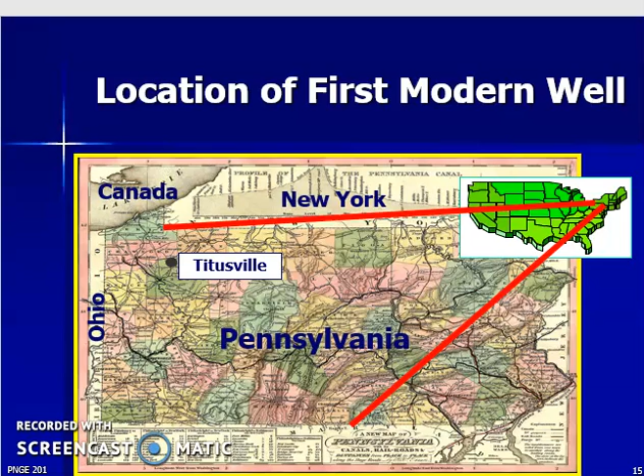So we're continuing on the topic of history of oil wells. The first commercial oil well was drilled in Titusville, Pennsylvania by Edwin Drake in AD 1859, and the reason they drilled this wellbore was based on the evidence of oil seep on the surface.

Later, in the 1890s, a guy named Pattillo Higgins promoted a drilling site near Beaumont, Texas. The reason he selected it was due to the features of the surface, which was a dome. He started drilling extensively during the 1890s, and he couldn't find oil.

Then he sold his properties to a guy named Anthony Lucas, who continued drilling deeper, and found that there was oil underground. That was the start of the discovery of the Spindletop well.

This was a change in the history of the oil industry, because the reason they drilled that wellbore was the location on the surface, not an oil seep. They didn't initially see any oil on the surface, but based on the geology, they decided to drill a wellbore.

The depth of this wellbore was 1,000 feet, in Beaumont, Texas. The well was drilled in 1901 by Anthony Lucas, and the rate of production was much higher, 100,000 barrels of oil per day.

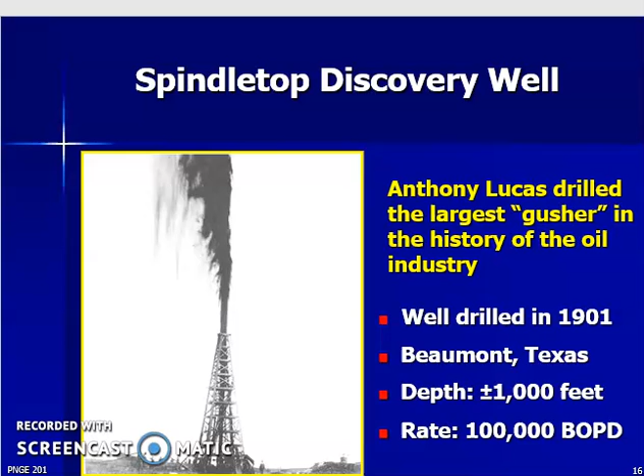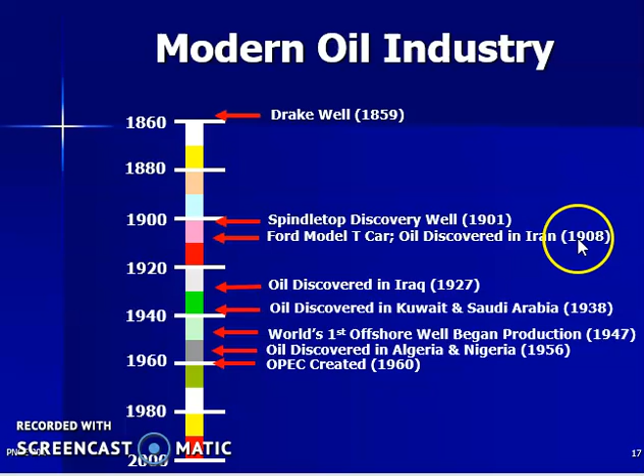This is a chart summarizing the modern oil industry. It started in 1859 with the Drake well, then the Spindletop discovery well, which we just discussed, and then oil was discovered in Iran in 1908, then in Iraq, Kuwait, Saudi Arabia, Algeria, Nigeria, and then OPEC was created.

OPEC is an association of countries that produce oil — the Organization of Petroleum Exporting Countries. It has 13 nations and was founded in 1960. There are a couple of countries which are members of OPEC. The US is not a member of OPEC, but it's an organization of petroleum producing countries.

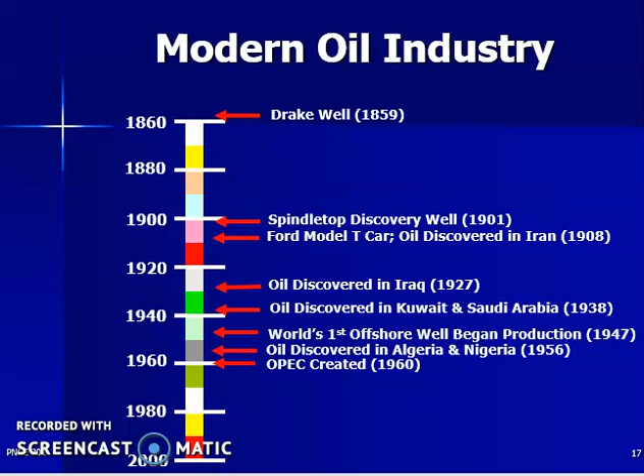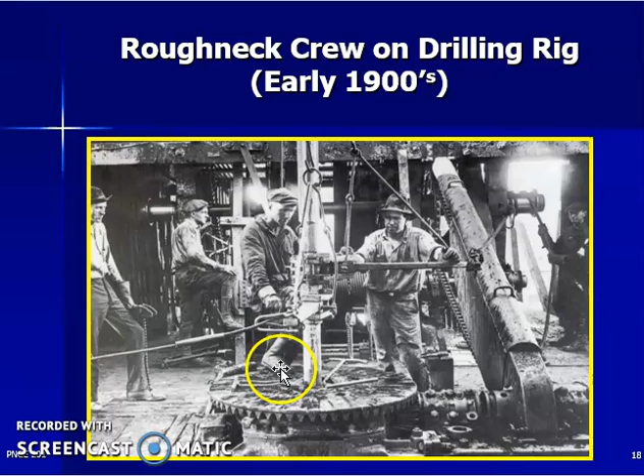So a couple of pictures about drilling. This is a drilling well site in the early 1900s, and a roughnecks crew on a drilling rig. This seems to be a rotary drilling rig, which we will discuss later on.

These are the rigs in early oil fields, and they were made of wood. These days they're made of steel, of course, and you can see how many rigs they drilled over there.

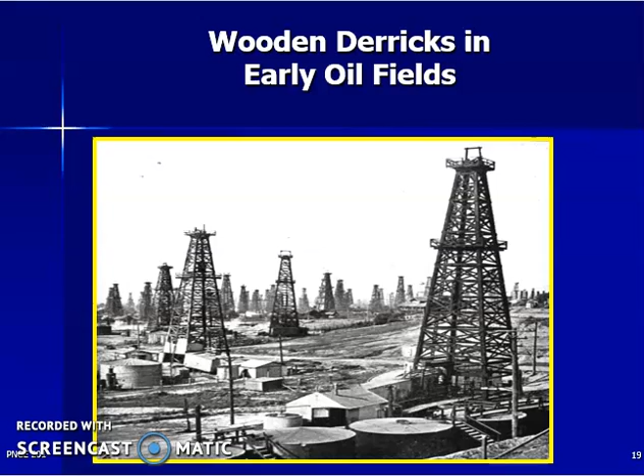Let's continue and talk about blowout. What does blowout mean? The oil underground is at very high pressure, and if you can't control the flow of oil to the surface, it's a huge pressure drop for the oil.

For example, let's say the oil in the reservoir is at a pressure of 5,000 psi, and then you connect this to the surface, which is at atmospheric pressure, 14 psi. This huge pressure difference causes the oil to blow out, and if you don't control it, blowout happens. It's an uncontrolled flow of formation fluid, oil and gas, to the surface.

In old petroleum industry practice, blowouts were very common, and they actually built dams to collect the oil, which was an environmental disaster. In modern days, they try to control it, which we'll hopefully talk about — what methods — and you'll learn more about it in the drilling engineering course.

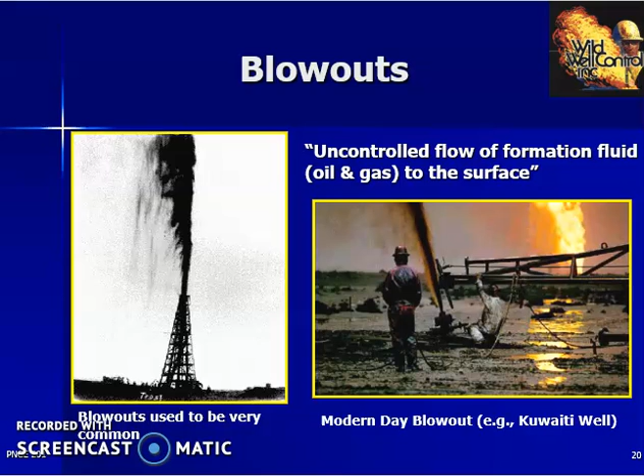This is called a blowout. One way they controlled it in the old days was by mixing nitric acid with sulfuric acid and glycerin to create a mixture which was a very powerful explosive, and it was used in oil wells to fight blowouts.

When they did this explosion, they basically reduced the amount of oxygen in the air, which is one part of the fire triangle. If you don't have oxygen, there will not be any fire. So they did the explosion, reduced the amount of oxygen in the air, and prevented the blowout from igniting.

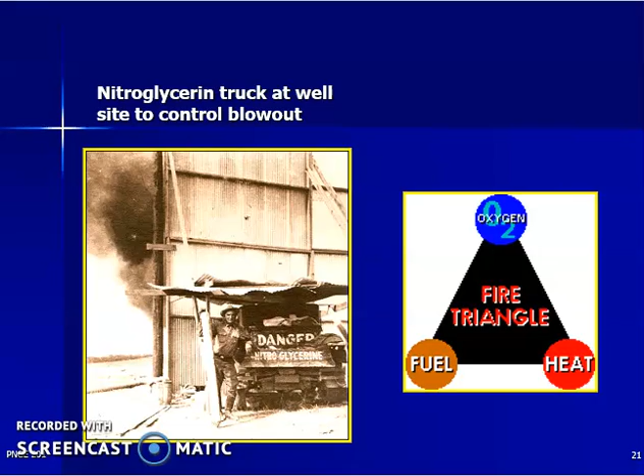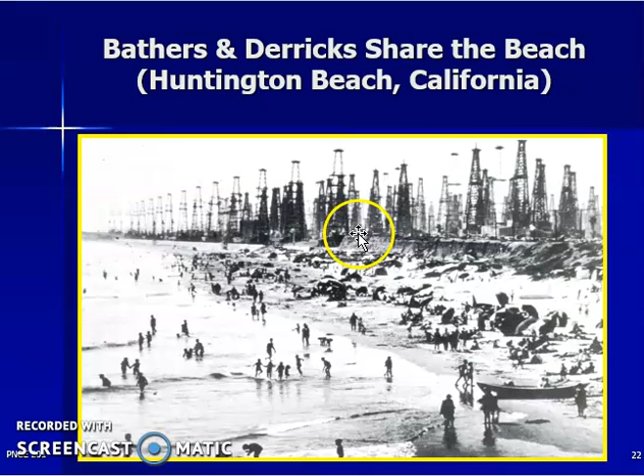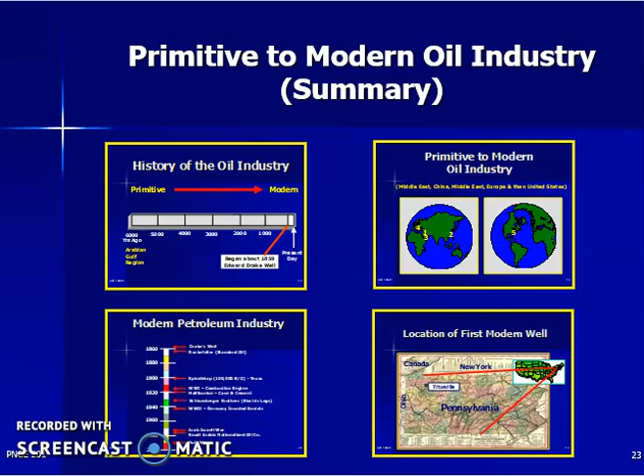In the next video, I'm going to talk about some statistics of the oil industry.